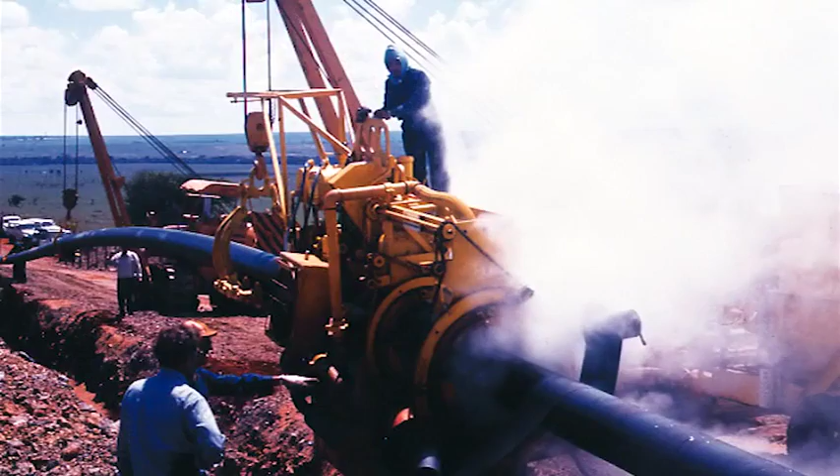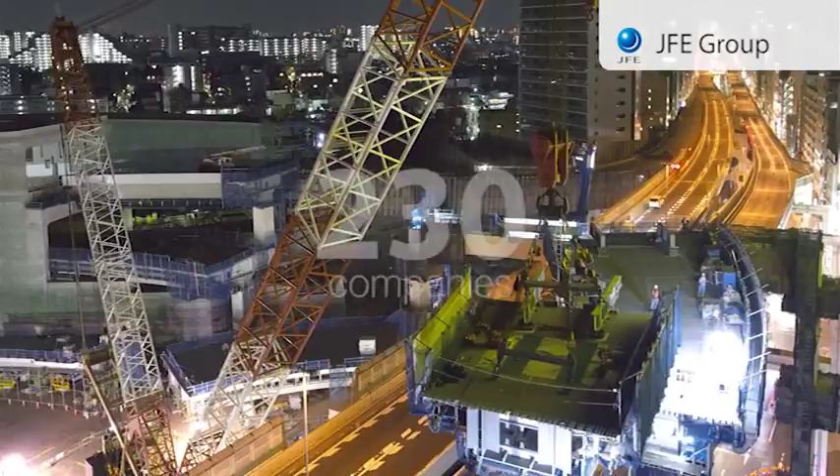JFE Group is one of the leading business groups in Japan, whose activities range from steel manufacturing to shipbuilding and to engineering and construction of industrial plants. JFE Group has 54,000 employees and 230 group companies. Its annual sales volume amounts to 32 billion euros.

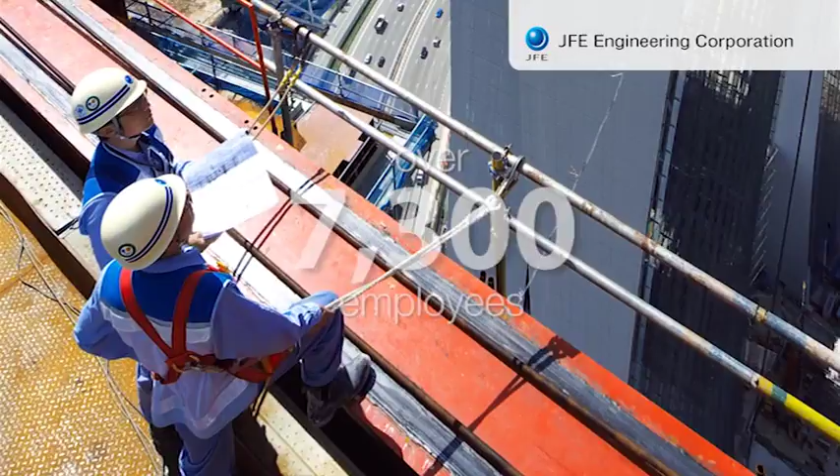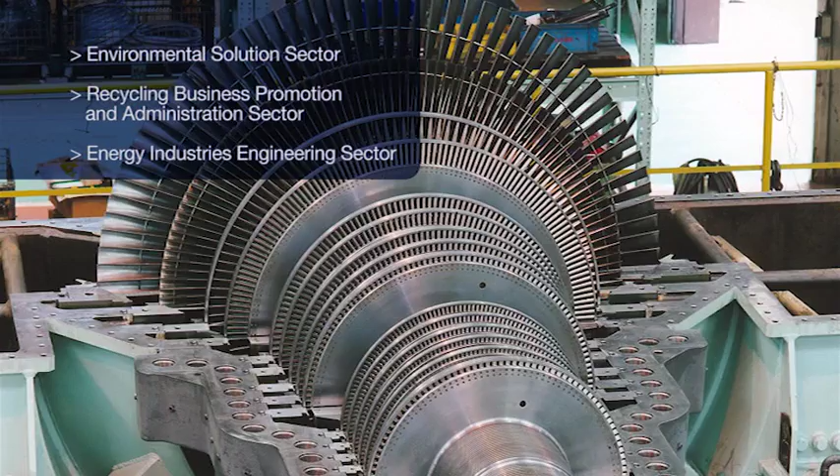JFE Engineering, with its 7,300 employees and its sales of over 2.7 billion euros, is one of the main activities of the JFE Group. It operates through specific divisions in these fields: environmental solution, recycling, energy industries, steel structures, industrial machinery, and research.

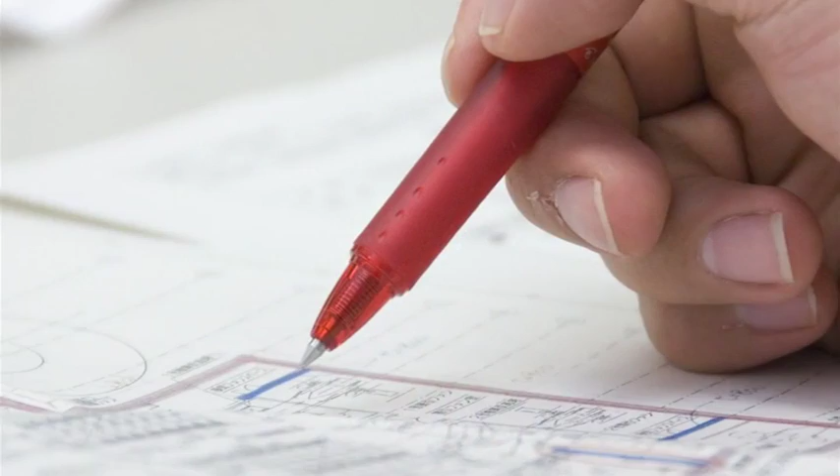Its engineering capability, extensive operational experiences, and a clear recognition of the changes in our society give the company a foresighted vision of the future. JFE Engineering gives priority to combining its corporate growth with respect for the environment. Japan, as a densely populated country, has had to focus on environmental protection, which includes resolving the waste disposal problems. Within this framework, JFE Engineering has been working for over 40 years to change waste into resource.

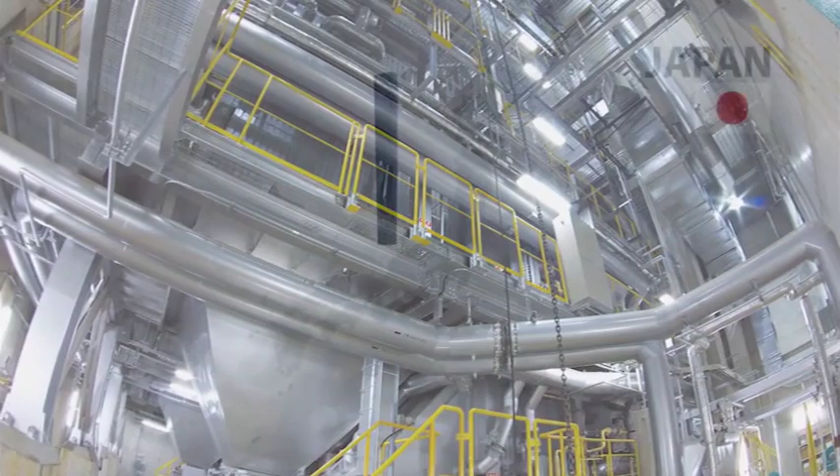From 1968 to the present day, JFE Engineering has designed and built over 150 thermal treatment plants, thus becoming one of the leading companies in the industry and contributing to Japan's success in its modern management strategy. Applying the technology, Japan has succeeded in drastic reduction in landfills, where now only 2% of the total waste is being directly landfilled. The growing awareness of environmental protection leads to the suppression of landfills and of the problems related to this kind of waste treatment.

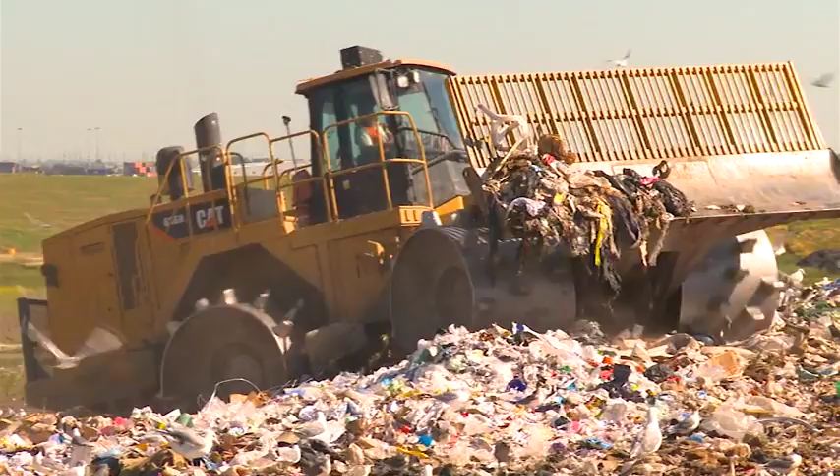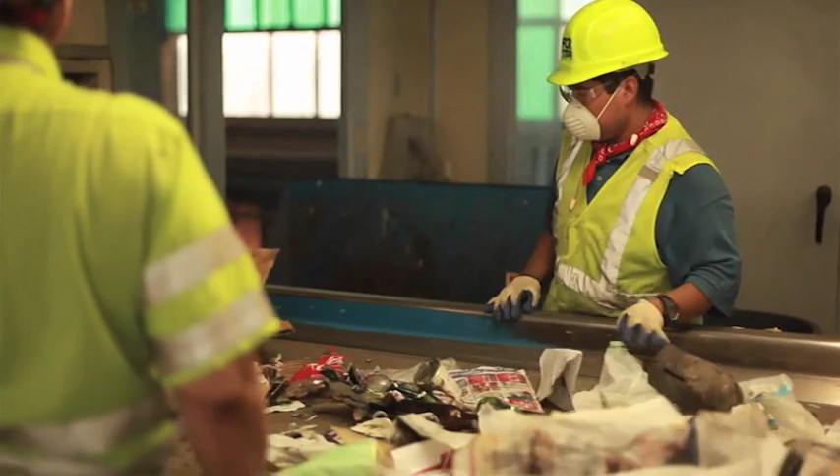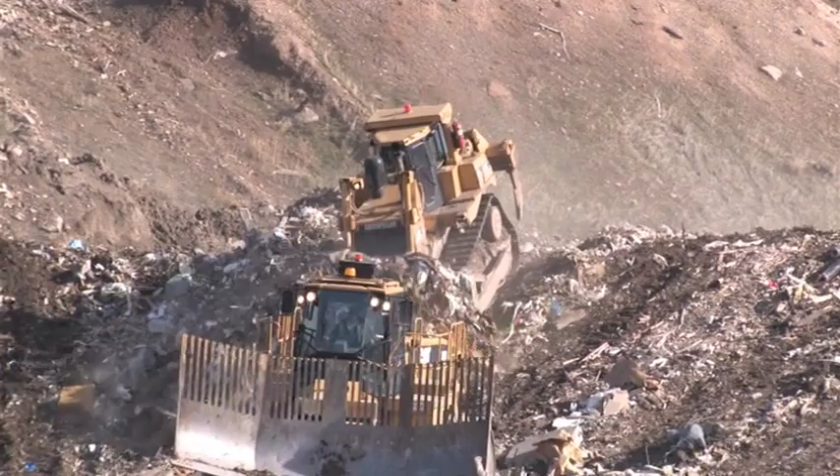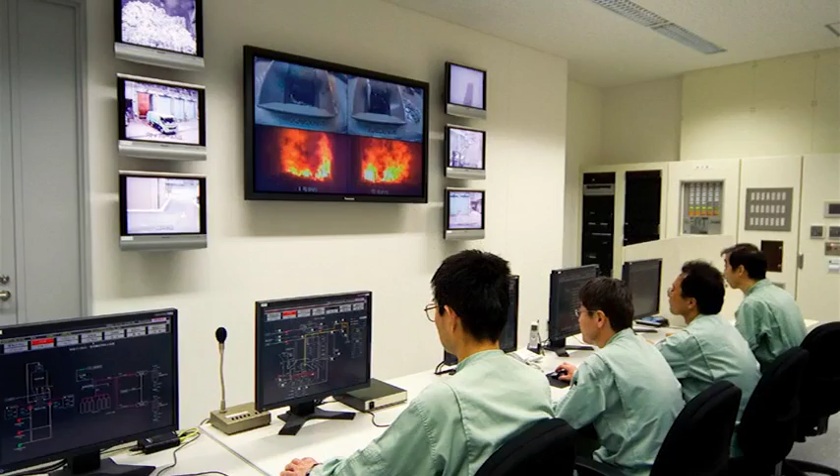In order to put an end to the era of landfills, the European Union has adopted a waste management strategy based on recycling and recovery. Nowadays in the European Union, about 40% of the municipal waste is being landfilled after treatment. The waste that cannot be recycled should be changed to energy or other valuable products through dependable thermal treatment technologies. This is the reason why for over 40 years, JFE Engineering has developed a variety of plant solutions for waste thermal treatment. It is now able to provide all the conventional technologies in their most advanced versions.

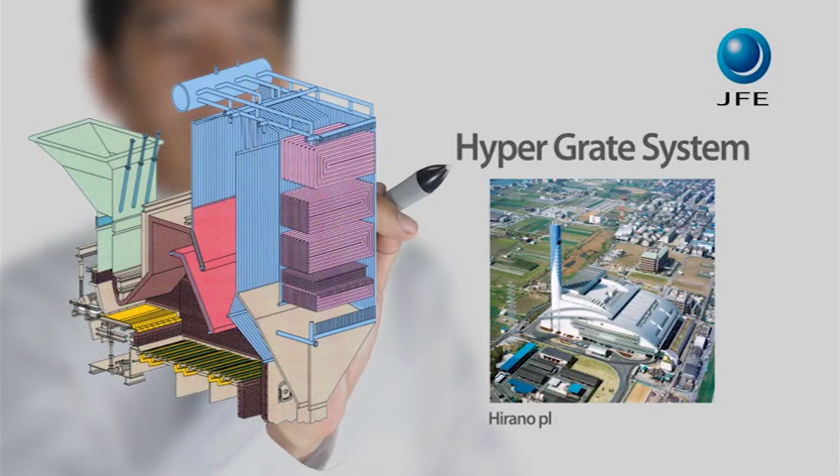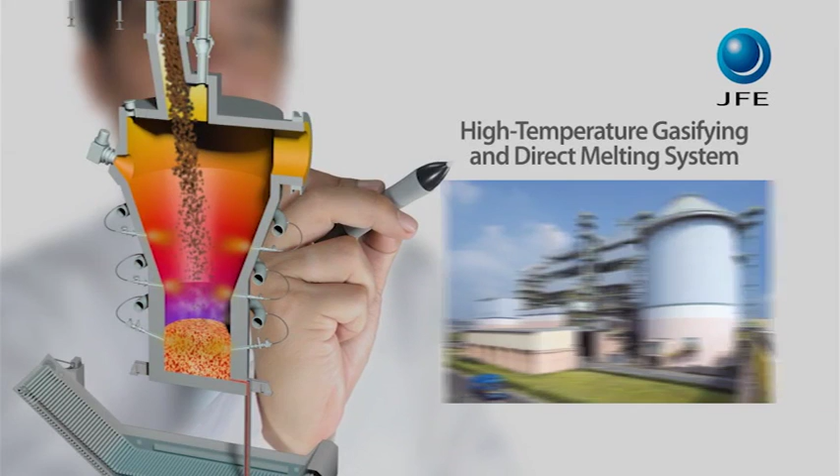For example, the Hyper Grate System, a cutting-edge development of the grate system that makes it possible to obtain the best performance ever with this type of process. The growing demand for environmental sustainability has led and will lead us to adopt increasingly strict regulations and social acceptance criteria. With this in mind, JFE has created its most advanced solution based on the gasifying process, high-temperature gasifying and direct melting system. High-temperature gasifying and direct melting system combines superior environmental protection performance characteristic of the gasifying process with high energy efficiency and top-level reliability.

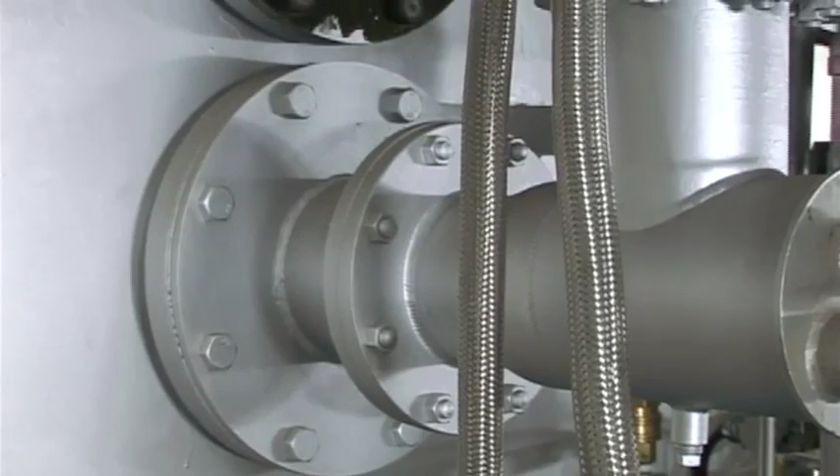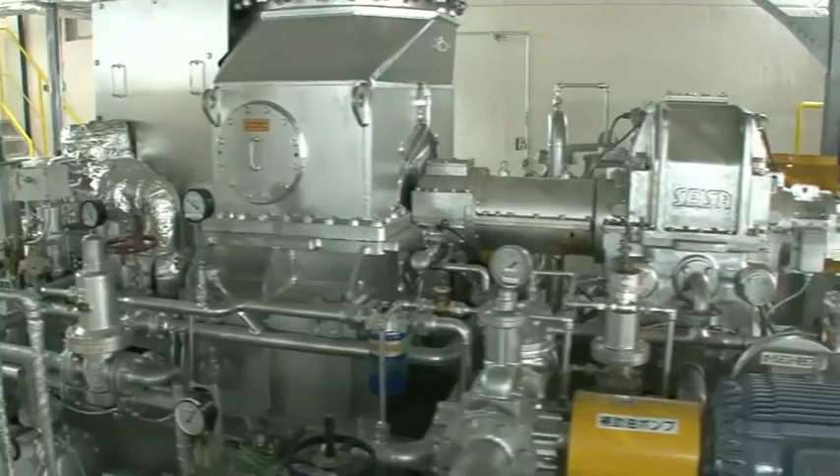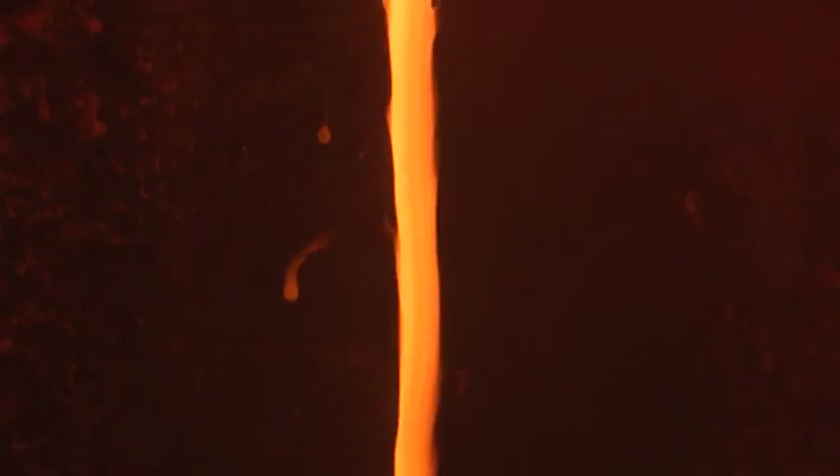The main feature of the process is indirect combustion through gasification of waste. Waste is no longer directly burnt, as is the case for conventional plants, but it is converted into gas. The gas generated is used to produce electrical and thermal energy through an efficient and controlled gas combustion process. By using this technology, it is also possible to recover incombustibles of waste as inert slag and metal, which are recycled in Japan for civil works and industrial purposes. In this way, bottom ash is no longer produced.

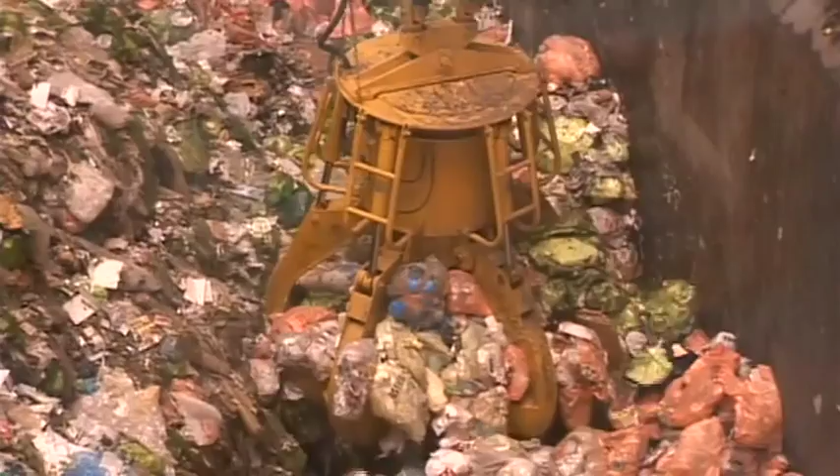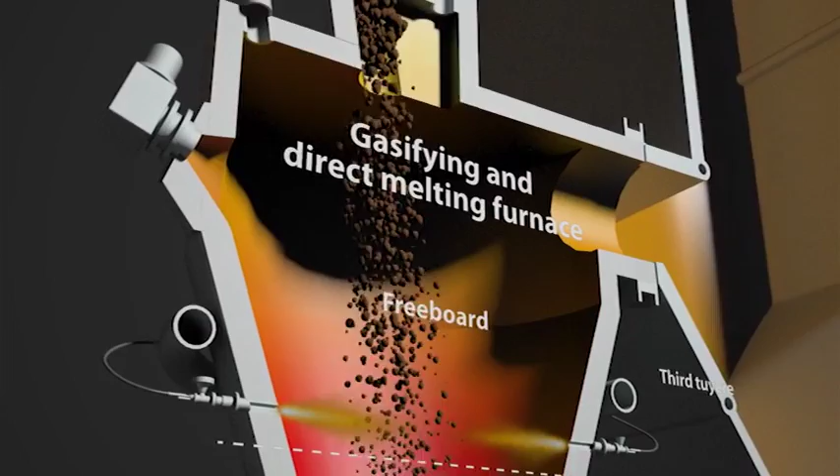The furnace is one of the key components of the system. Waste coming from the storage pit is fed into the furnace. In the gasifying layer inside the furnace, the waste that is placed into the furnace is converted to gas. This happens at 550 to 650 degrees Celsius by means of a controlled air supply through a third tuyere.

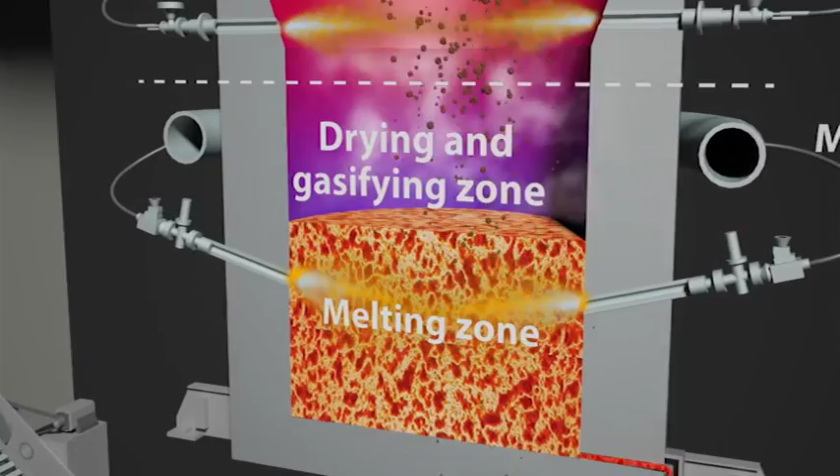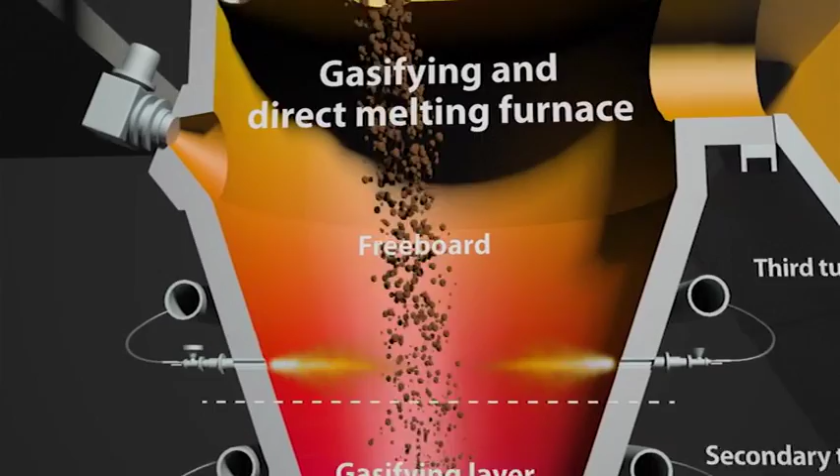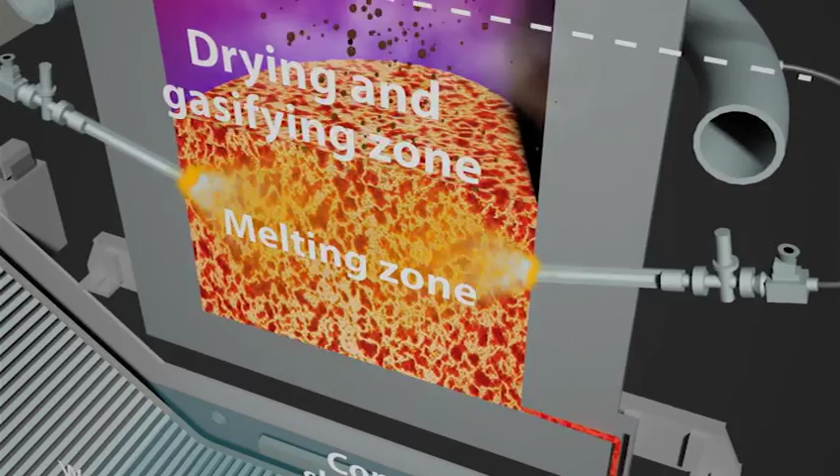Incombustible fraction of waste goes down to the melting layer, where a temperature around 1600 degrees Celsius makes melting possible. This high temperature is achieved with the combustion of carbon having the same function as in a blast furnace for steel making and the controlled injection of oxygen-enriched air through the main tuyere. The melted incombustibles are extracted continuously and brought back to its solid state in a granular form, thus making it possible to separate metal from slag.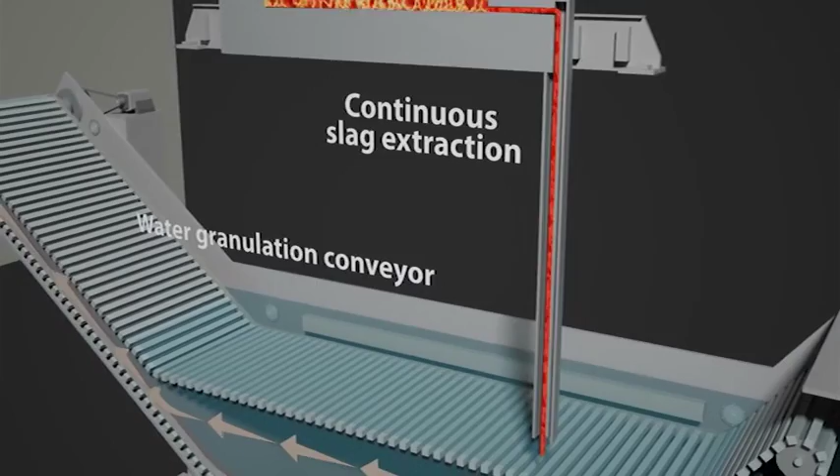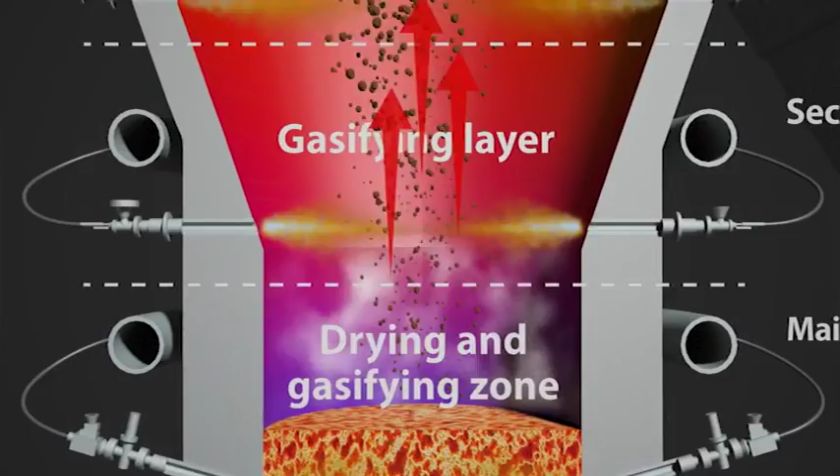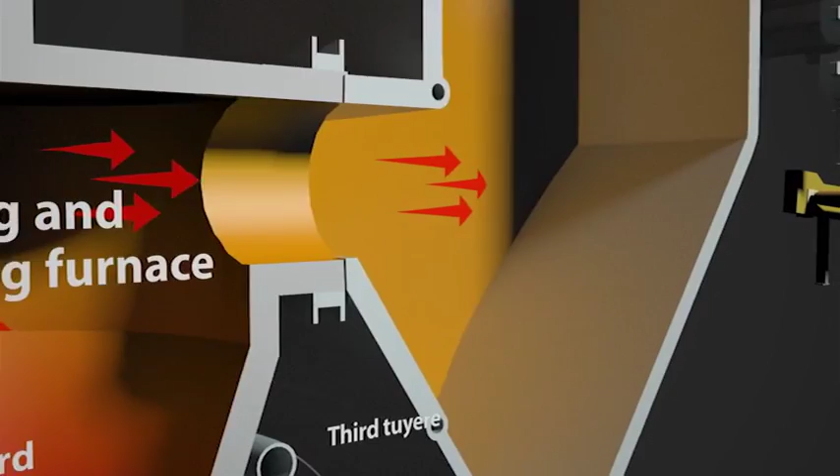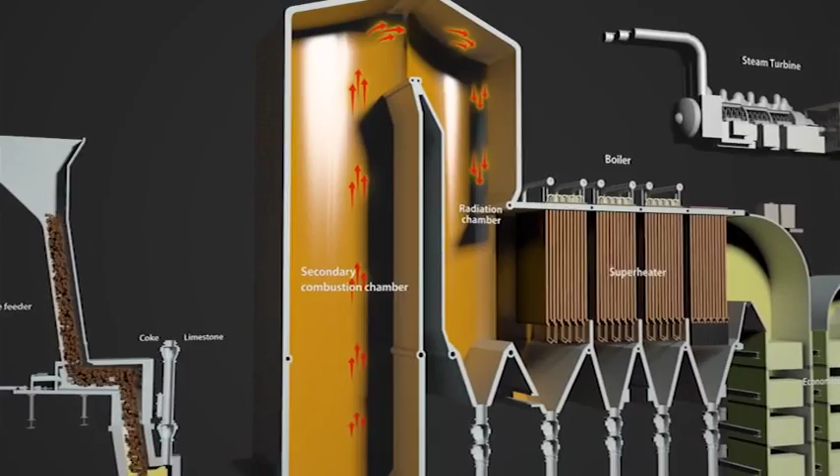The gas generated from waste goes up to the freeboard where it completes its conversion process. The generation of hazardous substances is prevented by the reducing atmosphere at a temperature of 850 to 950 degrees Celsius. The gas obtained from waste is combusted in the secondary combustion chamber. The heat produces high pressure and high temperature steam in a boiler. The steam generates electric power through a high-efficiency steam cycle or can be used for district heating or other industrial applications.

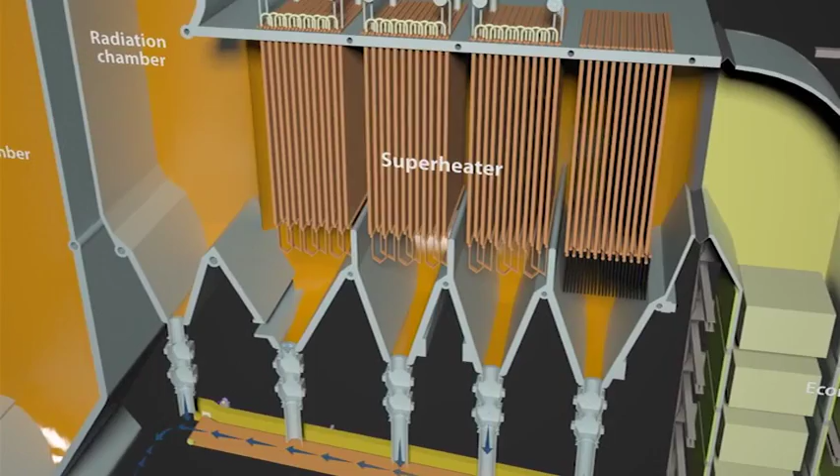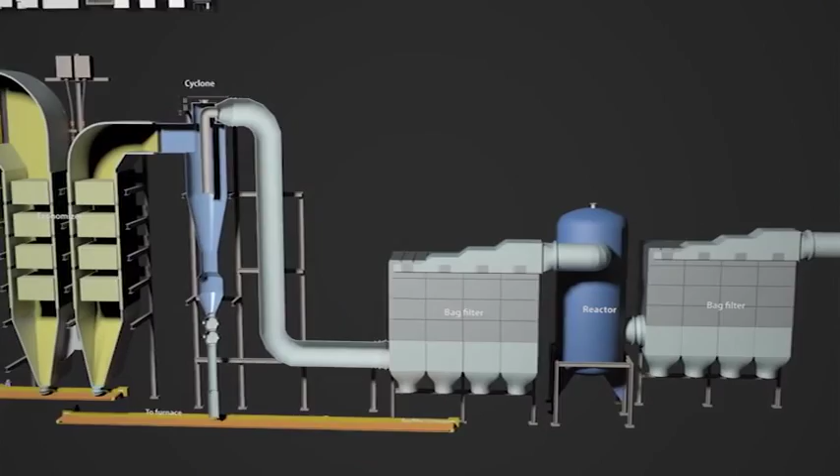To further increase the environmental performance of the plant, the residual ashes can be collected and returned to the furnace where they can be thermally treated. After passing through a conventional flue gas treatment system, the flue gas is constantly monitored and sampled for a close verification and to record its composition. Finally, the gas is released into the atmosphere. The officially certified record in Japan shows an emission level quite lower than the regulations. Especially, the concentration of dioxins is 1,000 times lower than the regulations in Europe.

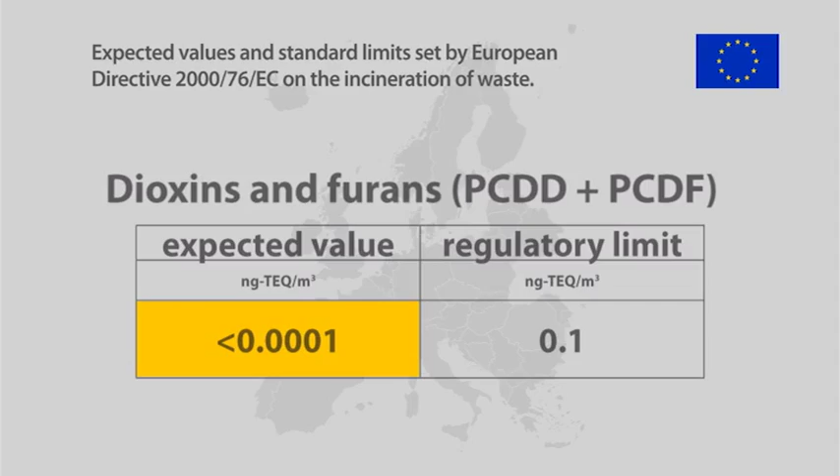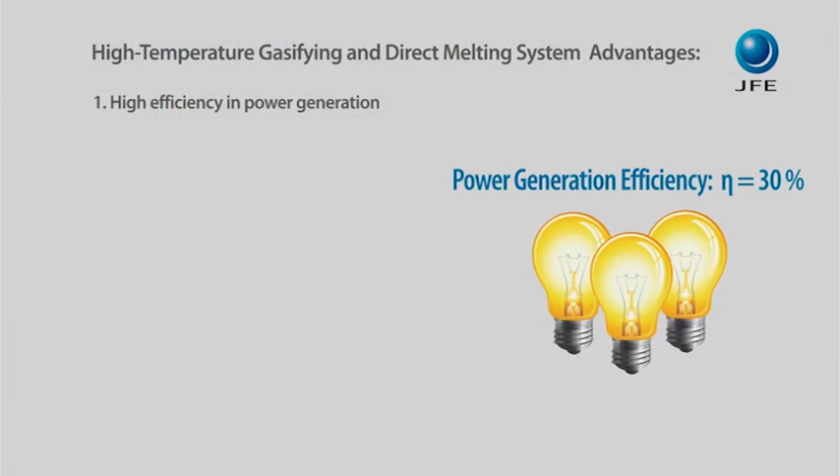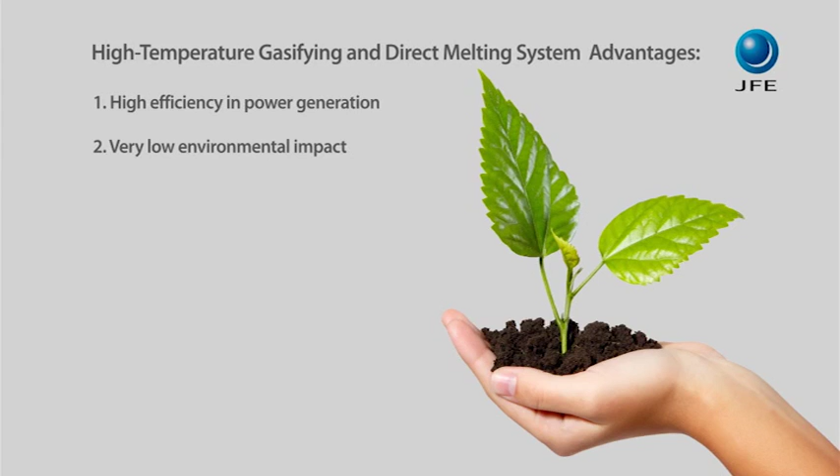The gasifying and direct melting system is the solution for solving problems associated with waste treatment in our modern society. High efficiency in power generation: an efficiency of 30% was realised in Japan. Very low environmental impact: the system prevents formation of dioxins with high temperature freeboard under the reduction atmosphere. All the plants built by JFE have been achieving much lower dioxin emission levels than the regulations. Reliability and safety: plant reliability and safety are proven through the track records of more than 10 plants since 2003.

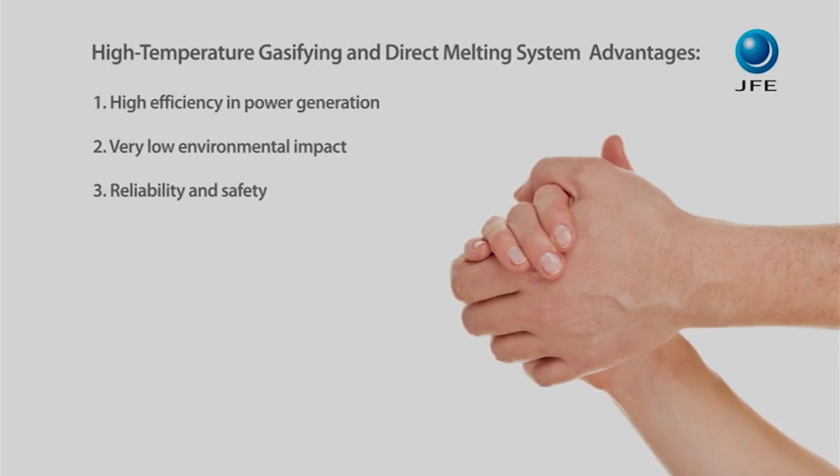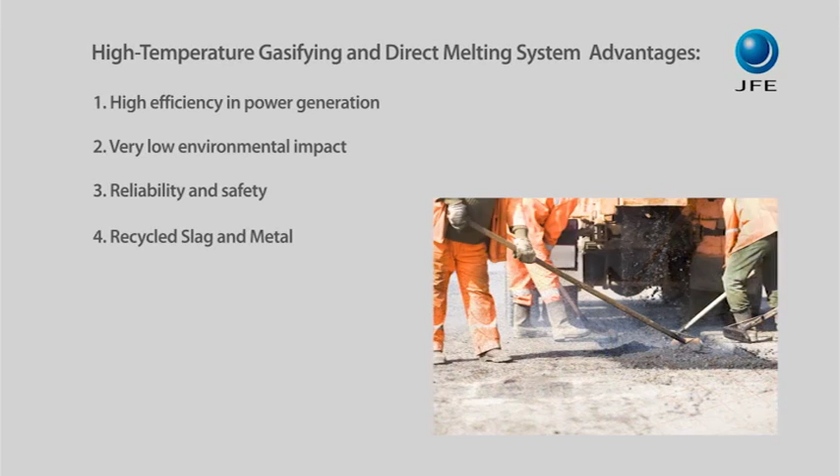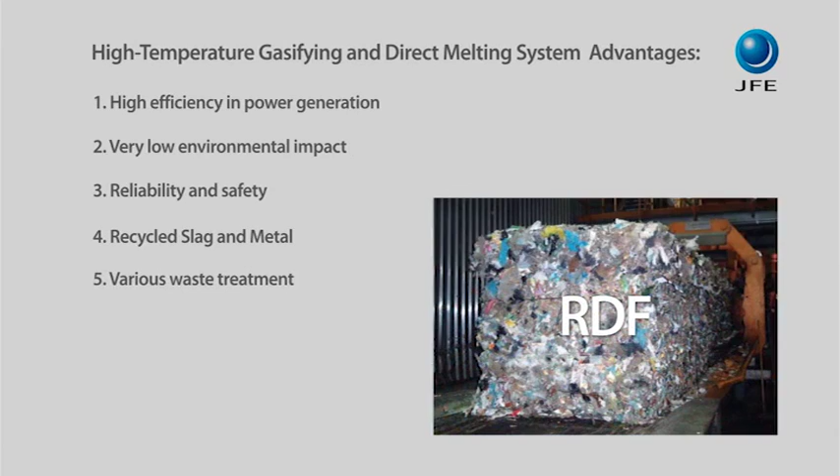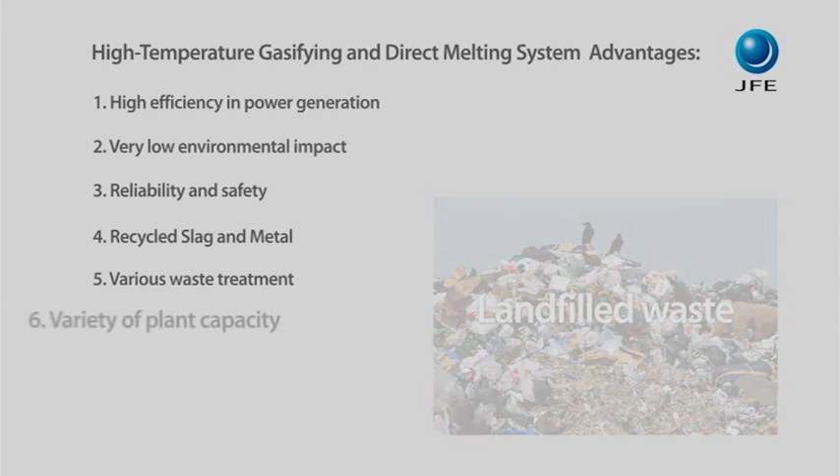Recycled slag and metal: slag and metals are being used in Japan for civil works and industrial purposes, such as backfilling, road materials, paving blocks, etc. Various waste treatment: a large variety of wastes can be treated, either pre-treated or not, including sewage sludge, automobile shredder residue, hazardous waste, and even landfill waste. Variety of plant capacity: plant capacities from 1 to 13 tonnes per hour are available.

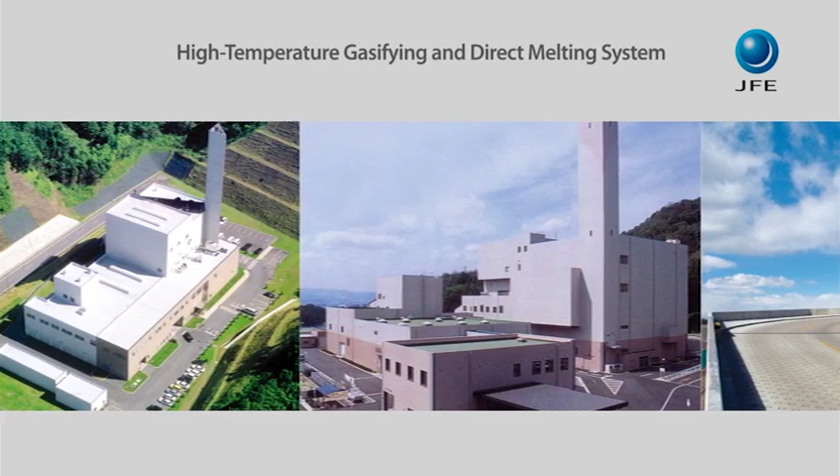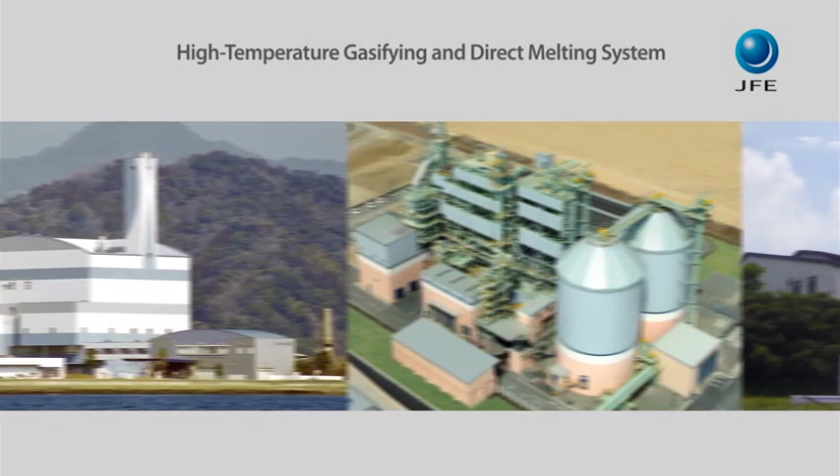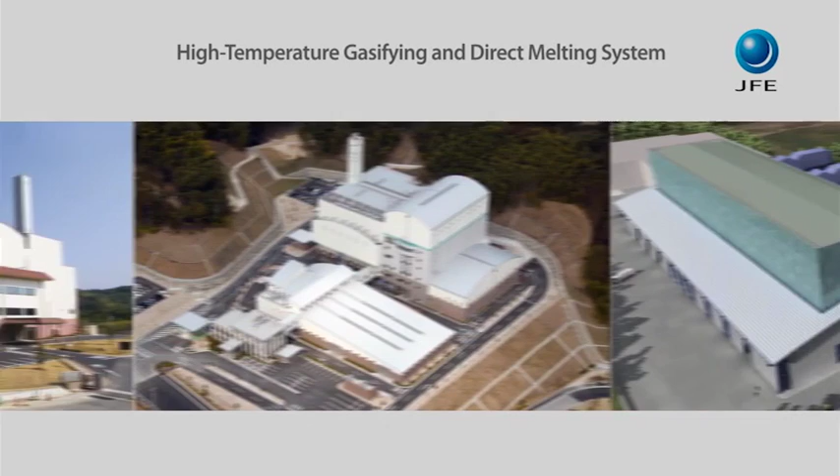JFE's gasifying and direct melting system is a proven gasification technology that is highly appreciated by clients because of the smooth and efficient operation of the plants that have been working for many years. JFE Engineering uses sophisticated engineering combined with a vast experience to design and construct environmentally friendly plants for the future.